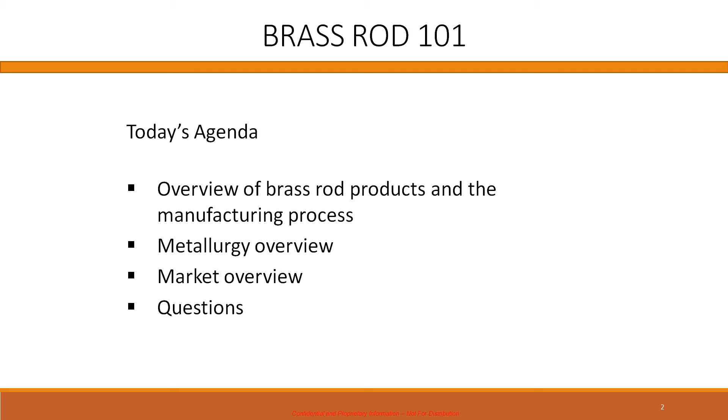Since you're a service center organization, this may be the least appealing part of the presentation, but I wanted to get everybody a little bit up to speed on what brass is and the fundamentals, how it's made, and then where, at least from our concerns, brass is headed.

Without making any assumptions on what everybody knows about brass, it's an alloy that starts with copper as the base, and after that there's really no hard and fast rules as to what defines a brass. Some people say it's an alloy with more than 5% zinc. Some set the minimum zinc content at 15%, but at least in the rod market, the highest volume brass alloy contains at least 35% zinc. On top of that, it's got some optional performance-enhancing elements to improve machinability, which is really one of the key factors.

More and more, requirements are to have additions that improve corrosion resistance or high temperature resistance. But machinability and corrosion resistance are now the big requirements for rod alloys being sold for the potable water industry.

There are also residual elements that get into the material because of the types of scrap melted to make up our charges, and they can be neutral or harmful to manufacturing. They can cause quality problems, they can cause field performance problems if allowed to get out of control, and there are even environmental issues too.

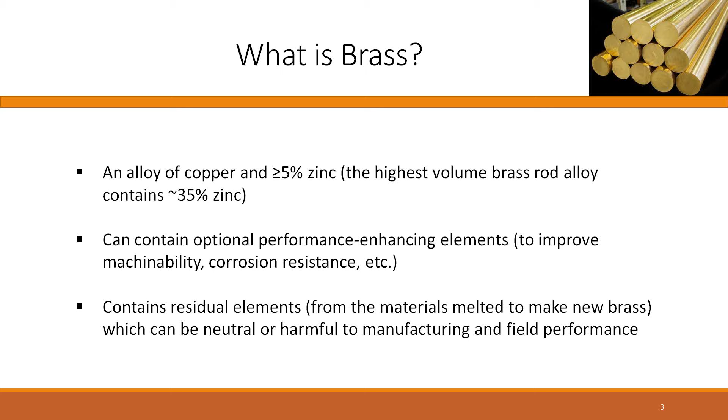Brass rod is made in a lot of different sizes, at least from 1/4 inch up to 4.5 inches, but you can go in smaller diameters at some mills. You can go to larger diameters, maybe not necessarily always cold drawn, but it's always hot extruded, and then it comes in different lengths.

And also for some applications, you may just take the 10 or 12 inch diameter billets that are cast and turn them in the as-cast condition down to a size that gets machined.

The biggest volume of brass rod is supplied as rounds, but it also can be made as hexagons, octagons, squares. There are special industrial shapes too, we call them lunch boxes, keyholes, bread loaves, and elbows. There's a lot of different profiles that are made to reduce the amount of machining at the machine shop in order for them to make their final product at the lowest cost.

For every pound of brass rod that's sold, industry information says about 65 to 70% of that is turned away as machining turnings and rod ends, and they all generally get returned to the producing mill because that's good quality input material for our melting operation.

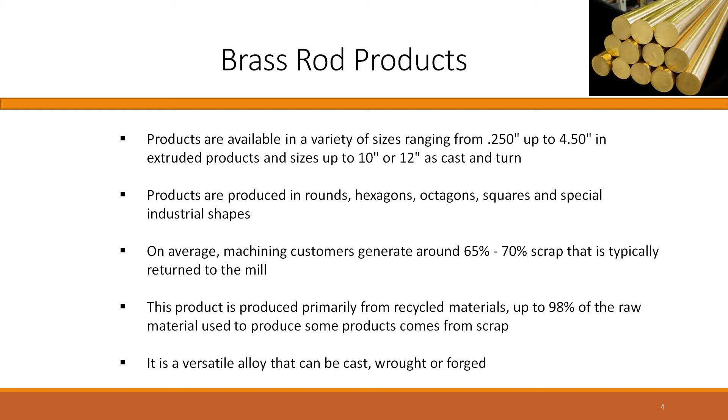Regardless of who makes it, the general process for making brass rod goes through this process flow diagram. You've got raw material receipt and testing, where you separate the wheat from the chaff, almost literally sometimes.

It's got to be the right chemistry, the residual elements we talked about before: iron, tin, nickel, manganese, aluminum, beryllium, tellurium, cadmium, arsenic, antimony. There are limits as to how much of those you can accept based on the product that you're going to cast. And there's also issues with physical shape.

Just because it's brass scrap doesn't mean it can be efficiently processed through the mill if it comes in what we call a giant bird's nest, which creates handling problems. Or it could be really wet, and that can be an issue in chip melting or melt control in the melting furnace. So we sort all those out, and then whatever passes goes to our melting operation.

And once everything is melted, chemistry samples are taken, and from that you determine what you need to correct in one of the elements, if any, so that you are within either ASTM limits, or if you've got tighter internal limits than ASTM allows in order to make your castings.

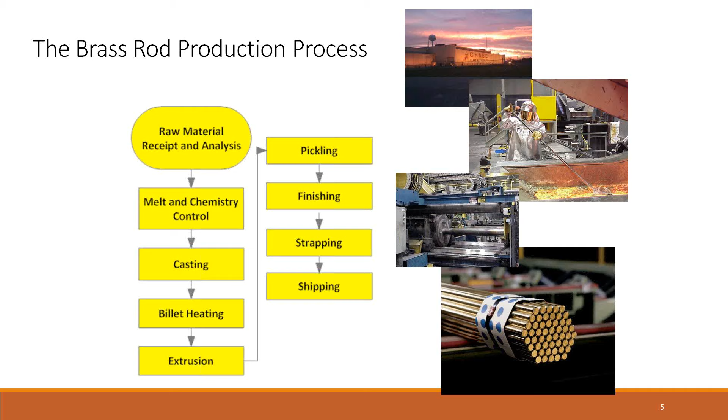Leaded brass has the properties and machinability that it does because of the combination of these different elements and then the cold working operation. Copper's got very good corrosion resistance. It's very ductile for cold working, so different alloys have different levels of ductility, so that if you need to bend it or put very coarse threads by rolling into the surface of the brass rod, you've got that available.

And then for a few applications, you want good electrical or thermal conductivity. Automotive requirements, for example, might require better electrical conductivity from some alloys than you can get in others, or that you can get from steel, for example.

Then you add zinc to make it brass, and that increases the hardness of the copper, for one thing. I'll show you a table here in a minute, but it also makes it even more corrosion resistant. In this case, it makes it more resistant to pitting corrosion.

And then you add lead to increase the machinability, and it's kind of a love-hate type of thing when you add lead, because while it decreases the ductility of the material so that you can get the best machinability, it also kind of fights against being able to roll really large threads into the surface of the rod.

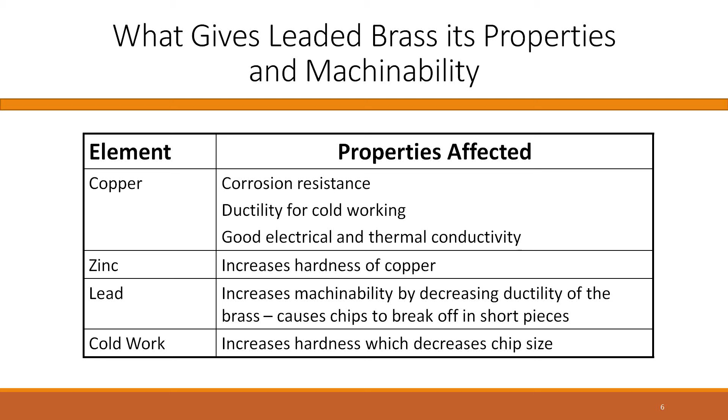Going on to the next slide, the old paradigm for machinability was the more lead you put into it, the more machinable it was. Well, because of regulations that have cropped up over the last 10 years or so, you can't solve your machinability issues by just adding more lead anymore. This data here shows that as lead content goes up along the horizontal axis, your machinability goes up, as you can see, along the vertical axis.

But without being able to use so much lead anymore, now there have to be different approaches that are taken to get machinability. And you can see the little green triangle to the left is representative of an alloy called 693, which uses silicon in place of lead to make it more machinable. And there's other options too.

You can add bismuth, you can add sulfur, we'll talk about in a bit, or you can add combinations of elements to try to get that machinability high so that the cycle times are short for the machinist, but without having any lead in there.

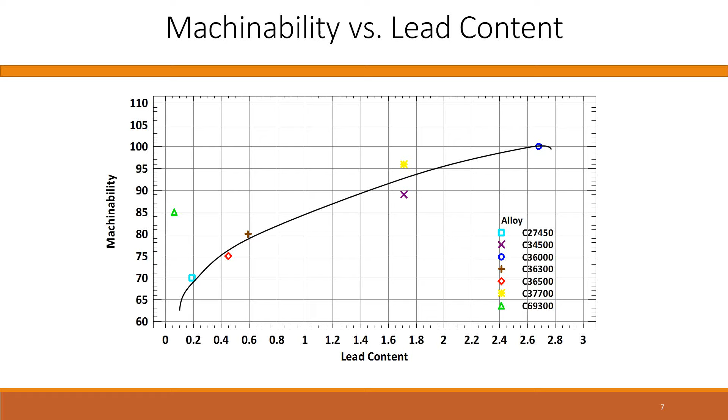The zinc content that we talked about is important for corrosion resistance and making the alloy harder and more machinable. You can see the impact of increasing zinc along the x-axis versus the hardness along the y-axis, or the vertical axis. As zinc content goes up, the hardness goes up, and it reaches a plateau after a while if all you have is a copper-zinc alloy.

Once you pass 35% zinc, it really shoots up high. And alloy 360, which is still the dominant leaded machining alloy on the market, is at that 35% zinc level. So you've got a pickup. Actually, it's a little bit above the 35% zinc. So you've got quite a rapid increase in hardness that helps with the machinability.

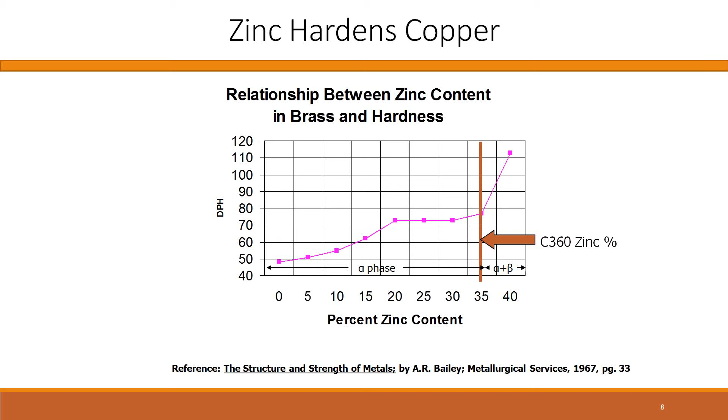When you heat the brass up for extrusion, it changes the microstructure so it's all that beta phase. That's actually a good thing for extrusion because it allows you to extrude a very broad range of sizes from a given input billet size.

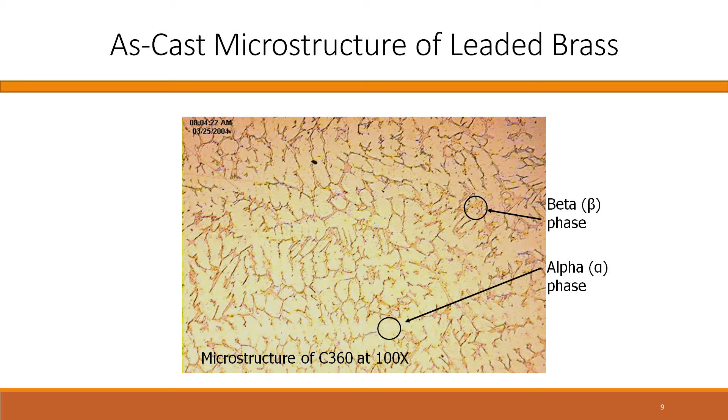But you don't want that there after it cools down. By proper manufacturing controls, what happens as the extruded material cools off is that the beta phase goes away. That's good because beta is very prone to corrosion.

That's what breaks up the chips during machining so you get very high machining speeds. The consequence of the lead distribution, the copper and zinc ratio, the hardness, and the cold work is the most machinable alloy of any kind, whether it's leaded steel, sulfurized steel, or aluminum alloys with lead or whatever else they use. Everything is measured against alloy 360 in terms of machinability, where alloy 360 is rated at 100%. As you get away from using lead and go toward alternative materials or approaches, that's when you have to try to do whatever it takes to get the machinability as high as possible.

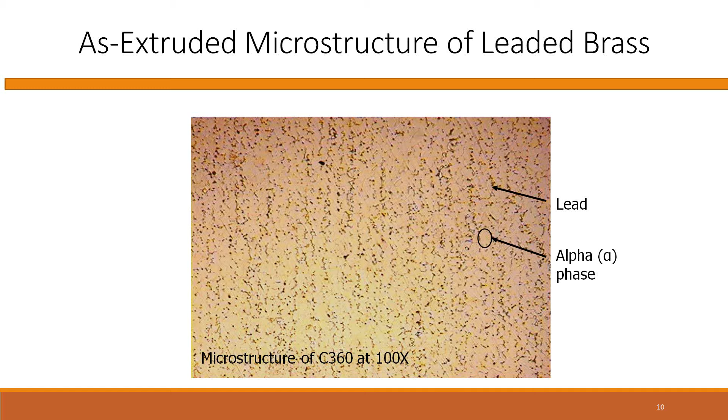So the amount of cold work is carefully controlled to achieve the best balance you can get in the hardness, in terms of the best machinability and the best thread rolling.

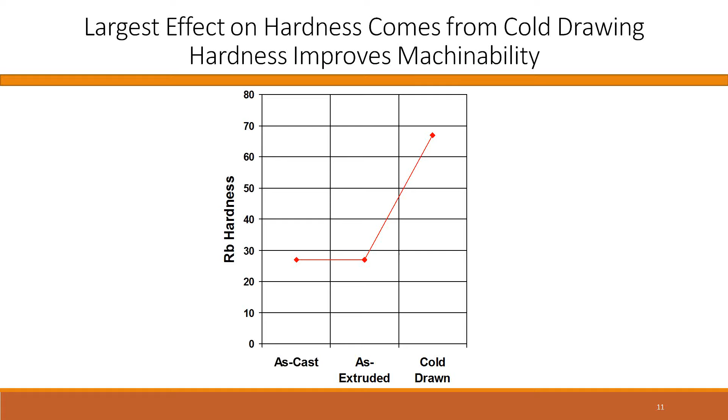Now that we're not allowed to use lead freely in our machining alloys because you're trying to make potable water parts, there are 3 different approaches being taken to get better machinability without lead. One is to have low lead to begin with, and then add something else. Those something elses can be shown in the periodic table, which I'm going to show you in a bit. But it's something that's trying to make another phase in there that can break up the turnings, and I have some microstructures that will show you that in a bit.

For about 20 years, if it's a casting alloy or some of the rod alloys, the rod and cold drawn rods, they use bismuth. Bismuth doesn't mix with brass, just like lead doesn't mix with brass, so there as discrete particles. Sulfur is now getting increasingly popular, something they use that also does not mix with the brass matrix and is there as discrete particles.

The other attempt to get a highly machinable alloy is silicon, either in combination with copper and zinc or in combination with other elements from the periodic table like manganese, for example. In the proper combinations this can give you a very machinable alloy, but it's not soft and smeary like a lead combination, so it can be difficult on tooling unless you do the right type of changes to your tooling and machining parameters to get the best machinability.

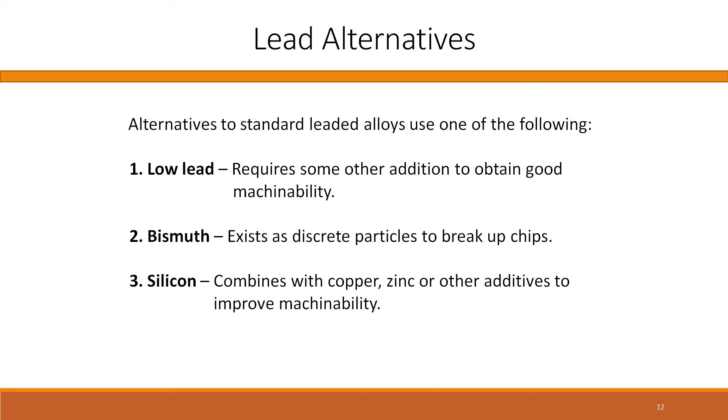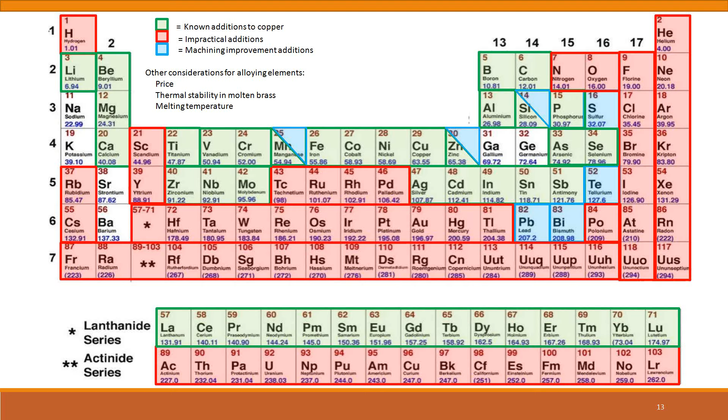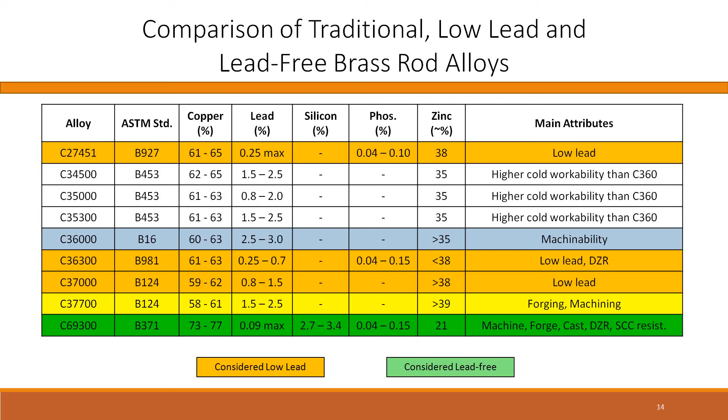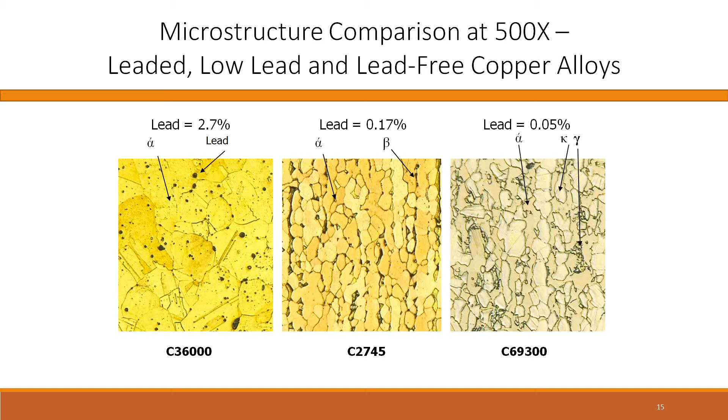All of these different alloys are being developed to try to meet the changing requirements of customers who need to make lead-free potable water fittings. They need it to be lead-free or non-leaded because there's a federal lead maximum now for potable water parts. They also need the parts to be dezincification resistant and stress corrosion cracking resistant, two forms of corrosion that copper alloys can experience, and those requirements are dictated by NSF in the NSF 14 voluntary standard for PEX fittings.

To reduce costs, there's a certain minimum amount of machinability these alloys have to meet, or a certain minimum ability to be forged, like alloy 377, or cast. The alloy has to be compatible with the sand, permanent mold, or die casting process currently being used. For parts that are brazed, soldered, or plated, the alloy can't have something in it that compromises those capabilities.

The alloy should be globally available, and preferably, when it comes to scrap segregation, you'd like to mix everything together. But some of these alloys require their own segregated scrap stream to get a minimum of contamination at the mill when they want to take this material and melt it to make new rod. So that's the metallurgy presentation.

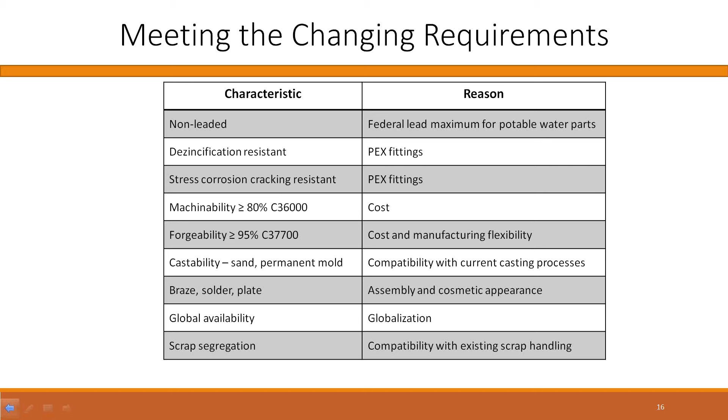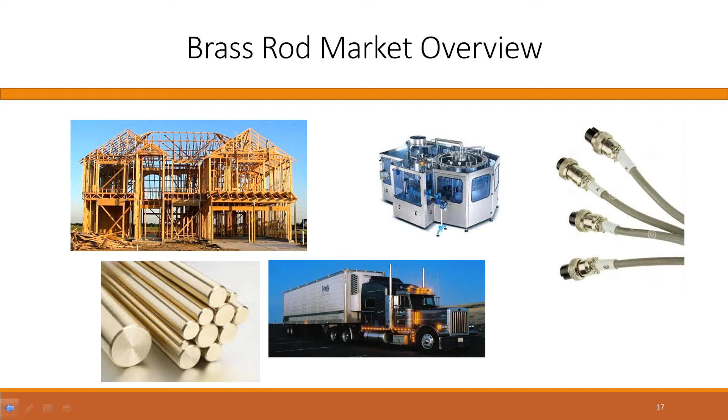So shifting gears now, we're going to give you some insight into brass rod applications, some of the trends that have affected volume in the past to get us where we are today, and what we see coming at us in the future. This first page is a good cross-section, everything from building and construction, transportation, industrial fittings, and coaxial connectors. This information is a reference from CDA, and they break the end use into certain categories.

The largest, as you can see, is building and household at 28%. That would be everything in your home - that could be a stop valve, a faucet, components in your HVAC system, and that would also be consumer products, like your garden hose, gas grill, or a handheld torch. So that's what would fall into that category.

The next one would be component parts, and that is a generic category. There's a lot of companies in the industry that are job shops, making a variety of products for multiple applications, and we as a mill don't typically have good visibility into where those parts go. So that's a catch-all category that you could apply to many of the other defined segments, but it gives you a snapshot of the job shop side of things.

Industrial machinery and equipment - those would be your fittings, connectors going into producing mechanical capital for factories, assemblies, that type of thing. Hydraulic, pneumatic fittings are very common in that application.

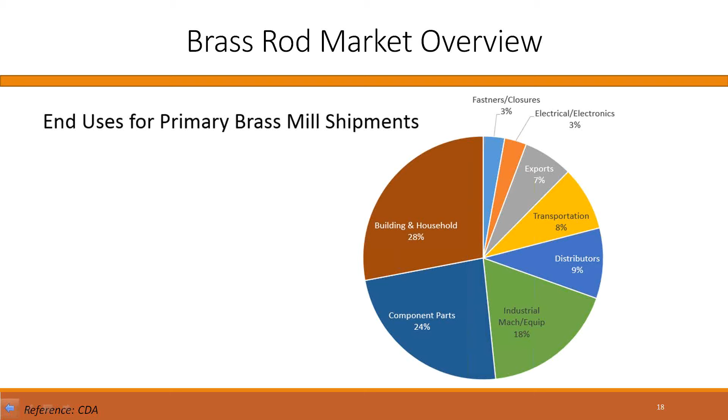So the domestic industry, you can see this volume in millions of pounds has seen a significant reduction. If this chart was to go back to 2000, 2001, you would see that total number is up over 1 billion pounds. What's really happened to us is a combination of things.

You've had, of course, globalization, which we really started to feel the impact of in 2001 with the recession. A lot of people are facing challenges on their top line, so to protect the bottom line, a lot of things went to lower cost countries for production. That had, we're estimating, somewhere around a 200 million pound impact on total demand.

In addition to that, you had substitution, and the legislation, as Larry referenced, has impacted that substantially - that's been the drive to reduce and remove lead content. So as products were re-engineered, they were often re-engineered into alternative materials, whether it be aluminums, plastics, or composites. In addition, you've had specific applications where parts are miniaturized or re-engineered to be smaller and have less metal. You've had downsizing - fewer domestic producers and consumers here. And then in general, just economic weakness over the last decade.

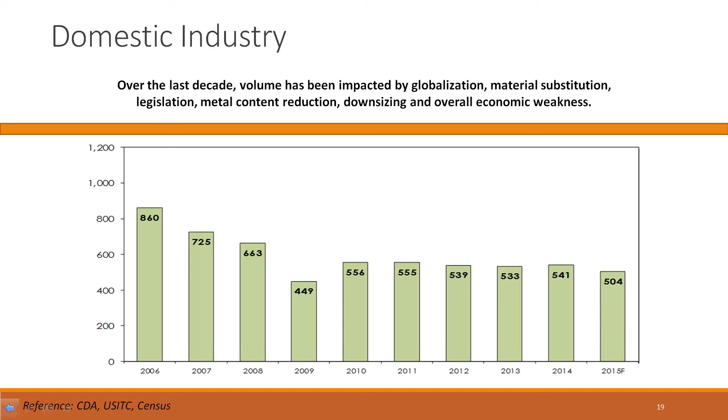So specific markets, just to give you a snapshot of what's happened. Certainly in building, all those plumbing products that had to meet this national legislation actually started in California in 2010, and it set the water pathway as a weighted average of 0.25% lead. That eventually went national here in 2014, and all these producers had to either re-engineer or redesign their products to meet this specification if they were using leaded brass as part of their pathway.

That's created a proliferation of multiple low lead and lead-free alloys, as Larry referenced, and that's certainly impacted demand, as many of those parts and components were unfortunately engineered into alternative materials. On the consumer front, things like hose couplings are being transitioned to aluminum and steel purely based on cost. In many cases, they're even plating them or coating them to look like brass because that's the preferred material. So that's been purely a transition.

Copper prices didn't help us when they went up to the $4 range in the last decade. They have since fallen back, especially very recently. But a lot of those conversions, once they take place, are hard to reverse.

On the transportation side, automotive parts are converted to aluminum. That's due to the fuel standards imposed on corporations producing automobiles. They have to meet certain targets, and they escalate each year, I think up to 2025.

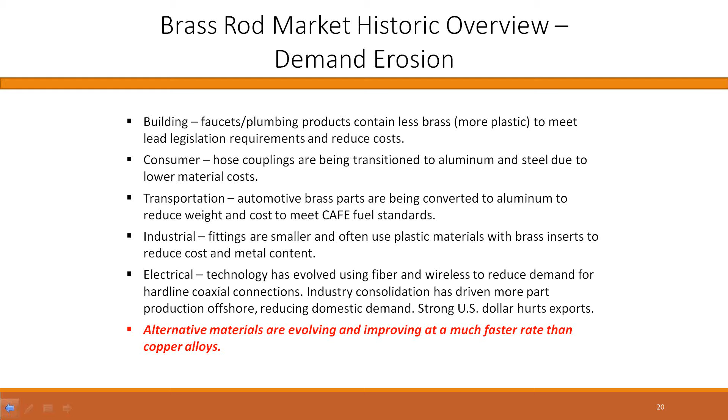From a demand standpoint, this just gives you a feel of what this year looks like. So 300 series rod and bar, classified by CBSA, is down about 7.9% through October. The CDA, the Copper Development Association, our industry data, says through November, one additional month, down about 6.5%.

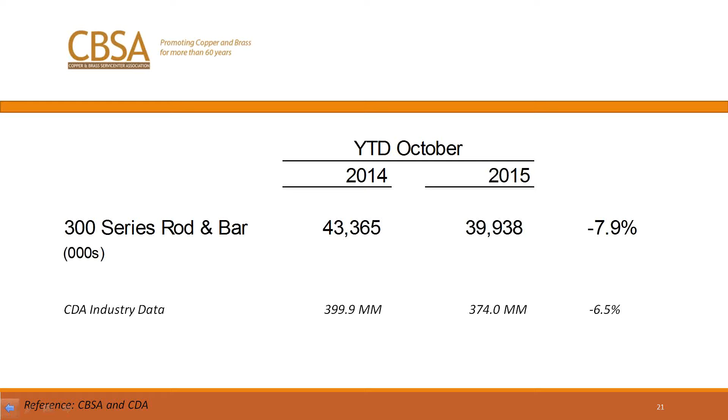So the key drivers, what really impacts demand, is a combination of things. First, we always look to the economic indicators, and I've got a slide on that next where we'll go through in detail what those indicators are. But they are usually the first visual we use to get a feel for where the market's at and where we think it's going.

Legislation has had an enormous impact, and we expect that to be ongoing. Right now it's primarily focused around plumbing products, but we expect over time that will likely continue and broaden into additional categories. Commodity volatility - a lot of companies, because of the volatility in copper, have chosen to go away from brass products. Again, fortunately it's worked in our favor recently as copper's dropped, but it's already done a lot of impact to the demand cycle.

Overall, housing dynamics are a big deal, and we'll talk more about this. But the demographics of the United States - the number of people being born and immigrating into the country - is having a significant effect on that demand. It's also driving household formation. And then the whole concept of single family versus multifamily.

What's happening right now is that multifamilies are growing at a faster rate than single families. That's happening for a couple reasons. One, the millennials, this next generation estimated between 80 and 100 million people, are just now starting to graduate, get their first jobs, fill some of the holes created as the baby boomers leave. And many of them are just comfortable renting, or they're not in a financial position to obtain a loan. So multifamilies are growing in numbers and volumes, and that mix affects the housing dynamics as well.

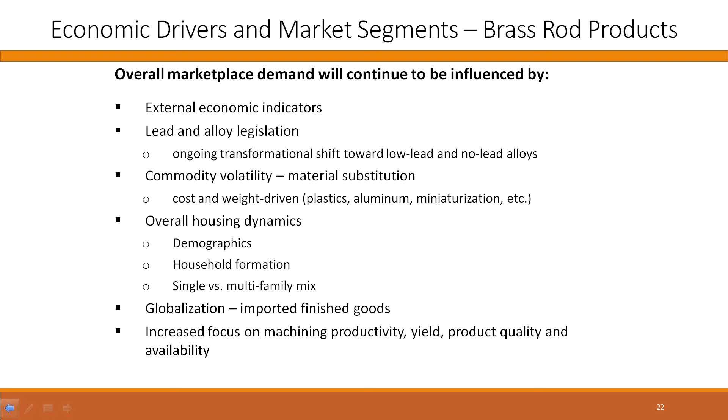The new residential, non-residential building - that's your hospitals, stadiums, schools, commercial buildings - all those things, of course, drive demand as well, and that expenditure is expected to continue to increase. Power infrastructure, to a lesser degree, drives some of that.

Existing home sales, and that number is important for two reasons. One, as home sales improve, that means demand is improving, and that starts to boost values, which generates demand for new homes. So that is a critical statistic that we evaluate.

At the same time, when people buy a new home, they typically are either remodeling it to sell it or remodeling it once they move in. So both of those will often trigger an event that will drive some brass consumption, whether it be a new faucet or a valve or a hose of some kind.

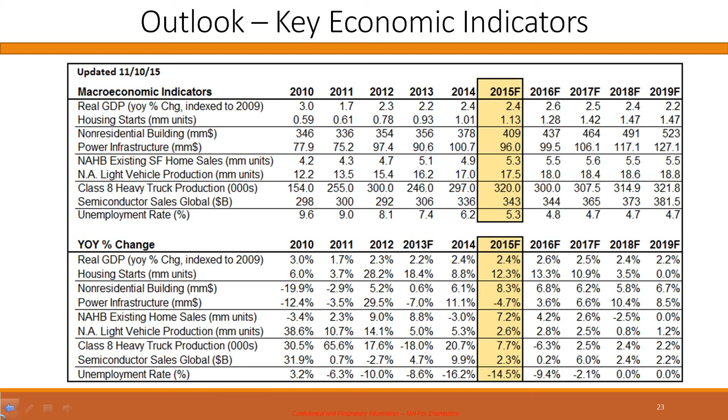Then in 2010, when California passed the .25, that became more prescriptive, actually defining the materials that can be used in the plumbing product. That was a big change, there was a lot of impact to the industry. And going forward, when it went national in 2014, it had a huge effect across the board.

Right now, they have requested an extension to that. The many European manufacturers actually have a coalition over there, and they are very confident that extension will be granted, which would give another 4 to 5 years of an exemption. The reason that's significant is, although it doesn't directly affect the U.S. standards, there's a lot of products that companies do make here that may have brass fittings on them.

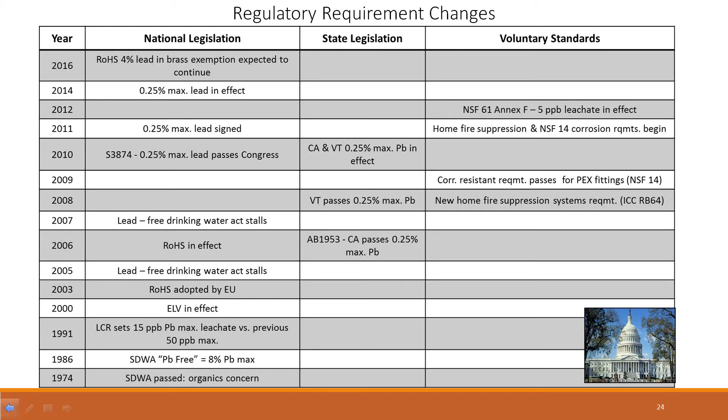The ELV, which is referenced down there in 2000, has a similar timeline to it, and we think that decision will also be made in the same time frame. ELV stands for end of life vehicle. They're also putting a similar limitation on the lead content.

So I think as a distributor, when you call on a customer, if they tell you they need lead-free, what I would suggest you do is ask more questions, because there's significant variance in what lead-free really means. The Safe Drinking Water Act was really related to that 0.25%. In the case of Chase, we make two alloys compatible with that, the 2745 and the 693. If it has to be below that, then you need to ask, what standard or what specification?

In the NSF 61, that's more of a leachate type standard, set at 5 parts per billion, which had traditionally been 15. That's a test where they have to produce a part and submit that sample to NSF for testing to validate if the leachate meets those requirements. Typically, you'd have to be below a 360 lead limit to pass that, or have some kind of post-production wash to remove lead from the surface.

The CPSIA, the Consumer Product Safety Improvement Act, actually sets that at a low standard. Right today, there are no domestically produced alloys that meet that lead content. I believe it's 0.03%, down to 0.01, down to 0.0. So it's tiered down to 0.01.

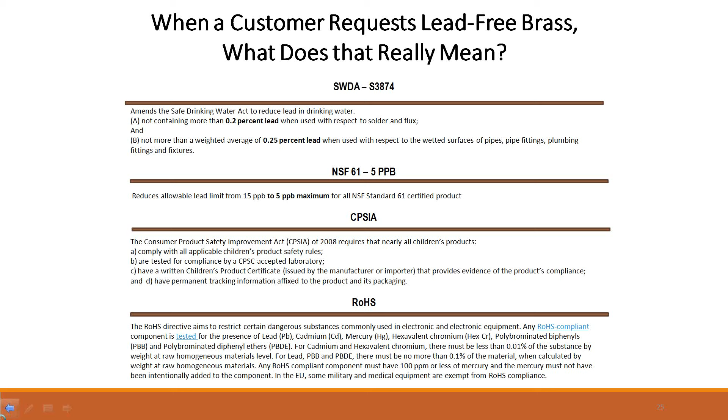Most recently, you're seeing the economic news and the outlook from China in particular has been driving it downward, in addition to a strong dollar. So this is just something we continually track and help educate our customers on. In many cases, our customers will pull what's called a firm agreement with us, where they actually firm up the rod and scrap price so they can have some stability for a window of time in order to offer that to their customer.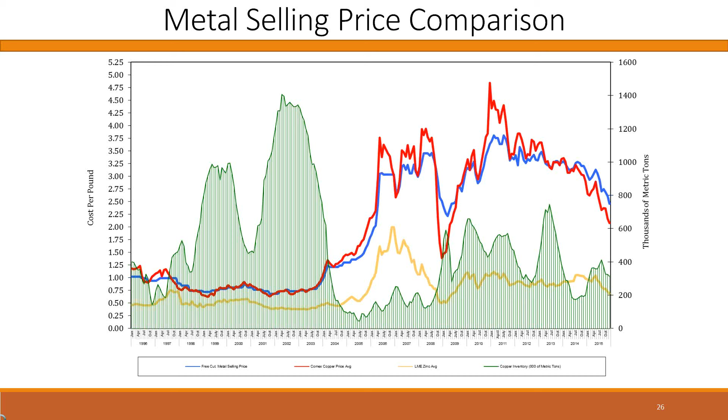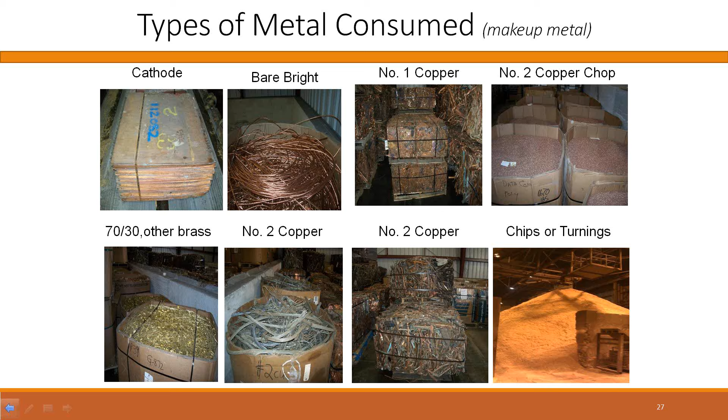We don't expect this to change in the near future. We think availability is going to continue to be challenged as global demand for copper and copper alloy scrap continues to grow.

So in general, what are the trends we see affecting brass rod? As we already said, we think there's going to be continued pressure to take lead out of products. We think customers will continue to look for opportunities to be more productive and efficient. We've got to continue to take cost out to keep brass parts as competitive as possible.

That's everything from machining at higher speeds to improving yields and reducing scrap generation. There will be increasing demands on quality material performance. A lot of our customers are starting to invest in high-speed machines and bar feeders, so we've got to have straighter product with better surface to make sure they can use that to make their parts. We think commodity volatility will continue, as we just discussed. Alternative materials and offshoring will remain threats.

We don't see that going anywhere. What we truly believe is the companies that build the strongest supply chains - and you guys are a part of that with your customers - are the ones that will survive. You have to provide a great level of value. You have to be efficient and effective and responsive. The companies with the best value proposition will be able to survive and protect their customers. Adapting to change is critical to success. If we just made 360 leaded product like we did when I started, we would be struggling to keep the doors open. It's become so critical that we evolve with the market and develop new products to meet the customer demand, and we'll continue to look for opportunities to do that.